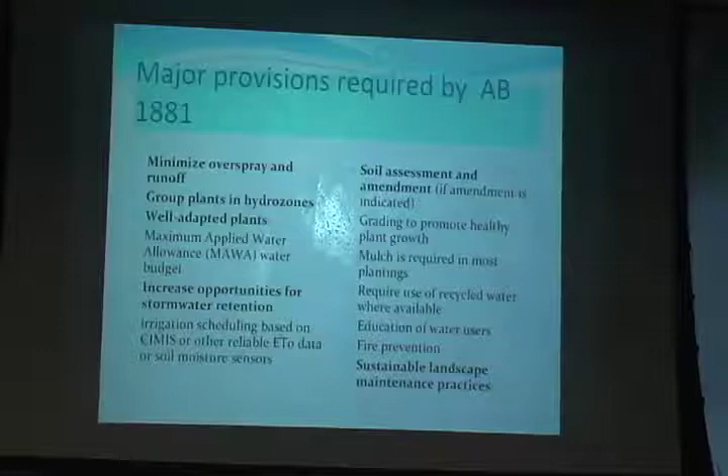So in 2006, a law was passed that said that DWR has to update an existing ordinance. This ordinance went into effect back in 1992, and it was a landscape ordinance. All the cities and counties were supposed to follow this when they did any kind of landscape development. Most of them didn't really follow it. So the legislature, recognizing all these issues that California is facing with pollution and our population growth and our infrastructure is maxed out, passed a law that said we need to look at this again.

And I'm not going to go through them because I actually brought a copy of the ordinance with the law attached to the back, so please take one. But these are the most important things, the most important provisions.

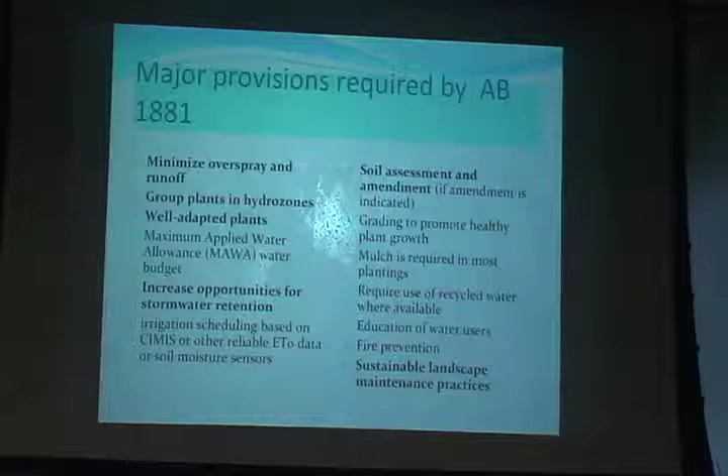And if you look at them, they're all kind of BMP stuff because we really need to follow best management practices when we install landscapes. They're taking over, they're kind of replacing natural spaces, so they need to function and not contribute to the problem. They need to be regenerative and solutions and still have their functions met.

So the most important things are things like minimize overspray and runoff. Group plants in hydrozones. I mean, what a concept. We put plants in a place where they'll be compatible with other plants. That's really been a problem. So you have to irrigate them all funny to make them work, and they won't survive if they're not in a hydrozone, because one or the other is going to suffer if their irrigation needs, their water needs are really different. So put them together. They need to be well adapted to our climate.

Use native plants or things from other Mediterranean climates. Why fight it? There's many thousands of plants that will grow here in California and do really well without having to have tremendous inputs.

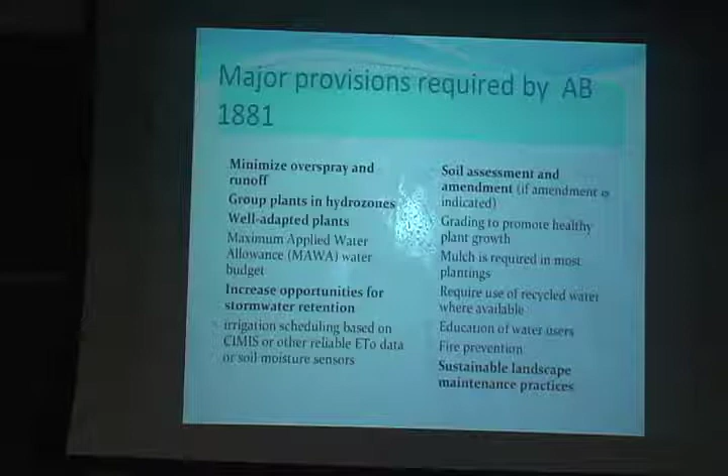Increase stormwater retention. You know, we're shedding all of our rainwater to the ocean. We need to keep it on site, let it soak into the ground, and let it move out to the ocean more naturally and slowly. And you can see they're all really important things. But I'm not going to go through the whole list.

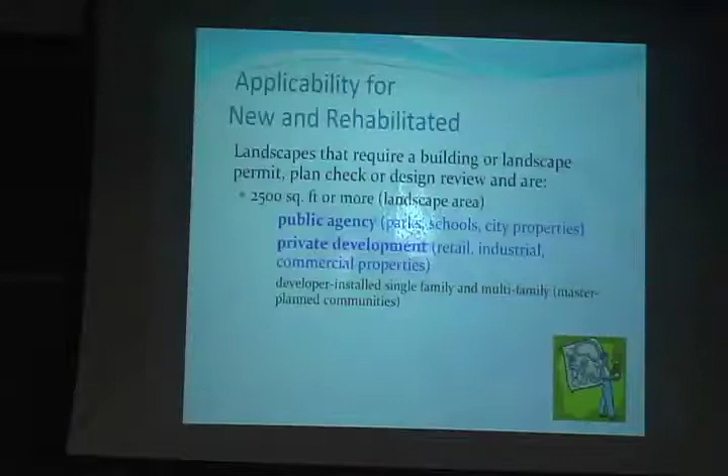That is probably the most important of the provisions. You guys can do a great job building a really great landscape with good plant choices, artistic and functioning well and gorgeous, and then they'll hire a really terrible maintenance contractor who tops your trees and shears your shrubs and won't replenish the mulch. So this is something to think about—how are they going to maintain it after you've turned over a design and it's been installed?

I'll put this in real quick. There is actually a law that says it's illegal to waste water. It's in the state constitution. So I just want you to think of that—it's very important, and it's recognized at the statewide level to not waste water.

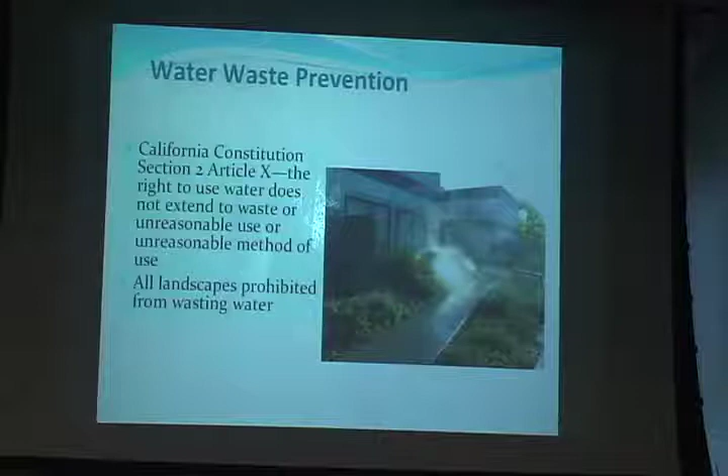This is a very common sight everywhere you go. Since you've been in the landscape architecture program, you've kind of seen the world with new eyes, new glasses maybe. When you're going around, you're thinking, I wouldn't have used that plant, or I would have done something different here. Look at how the sprinklers are not working properly. Those are the kind of eyes you need to have when you're going around in daily life, evaluating other people's work, and then you get an idea of how you can improve on that.

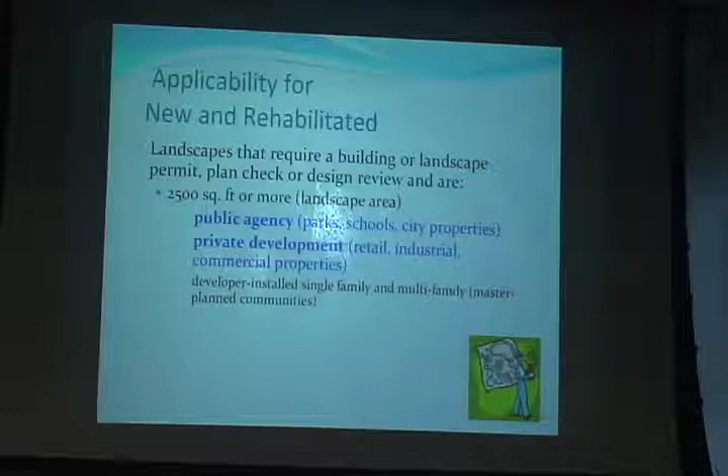So the applicability for the landscape ordinance is mostly new landscapes that are over 2,500 square feet—it's all new landscapes, but mostly new and rehabilitated landscapes over 2,500 square feet. There'll be public projects and commercial projects, like this campus at Intel in Folsom. It also involves developer-installed single-family homes, so we'll get to that.

So how about Cal Green? Have any of you heard of Cal Green yet? It's a new California building code—the landscape ordinance is actually in the building code now as of January. So cities and counties have to adhere to it from two different directions. Fortunately, they're compatible, they're the same. It's not like you have one set of rules from the planning department and another set to meet the building code. They're compatible—they use the ordinance as their baseline.

The only difference is that they require dedicated landscape meters on sites at 1,000 square feet rather than 2,500. A dedicated landscape meter is when you have your main line coming in off the street water main—they split it, so one line goes into the building and a separate line with a meter goes out to the landscape. That way they can track water use and do leak detection, since they know what's going into the landscape versus the building, and you can monitor it a lot more easily. Leaks are a big problem in landscapes because things get broken.

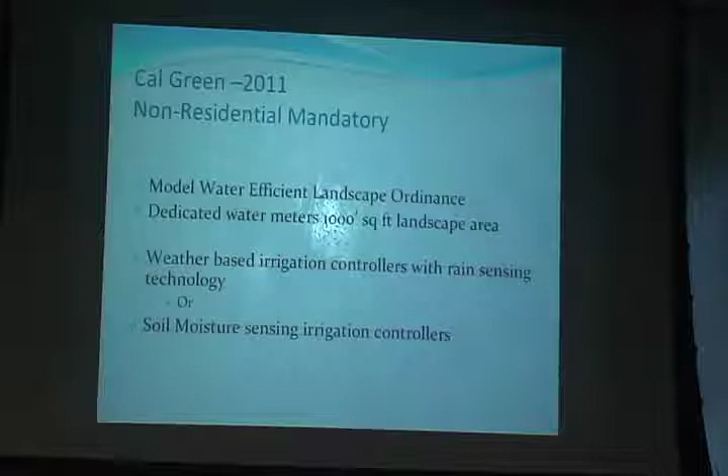So those are the mandatory things. They do kind of like LEED—they have some voluntary provisions where you can reduce the water budget. I know Lauren's talked to you about the MAWA before. They've modified it on a voluntary basis to lower the water budget to as low as 50% ETo. But that's all voluntary. You can see it's meant for green building—gray water systems, rainwater collection, all these things will give you points in design.

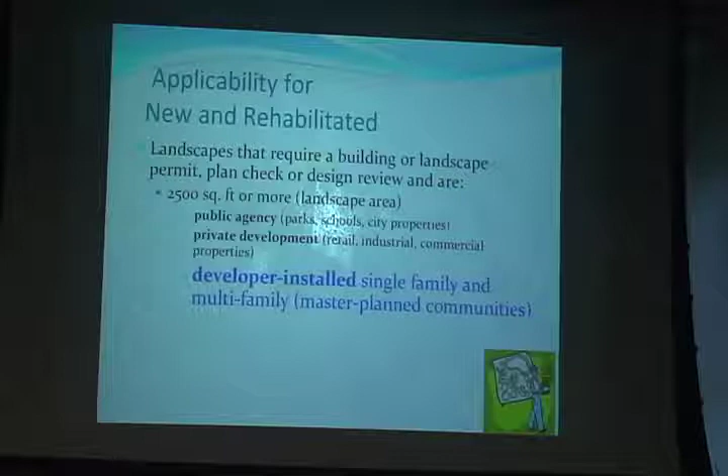So I did mention single-family homes. For developer-installed single-family homes, like a tract home situation, it's applicable. Now I said 2,500 feet—well, these guys are put through the planning department as a project, not an individual basis. So a tract home neighborhood's individual front yard landscapes might only need 500 or 600 square feet, but when they permit say 50 or 100 homes, cumulatively that's over 2,500 feet, using the same sets of designs throughout the whole complex. They might have 3 designs, the same plant palette, so it makes sense to aggregate them, and they're all built the same. That's why they're applicable.

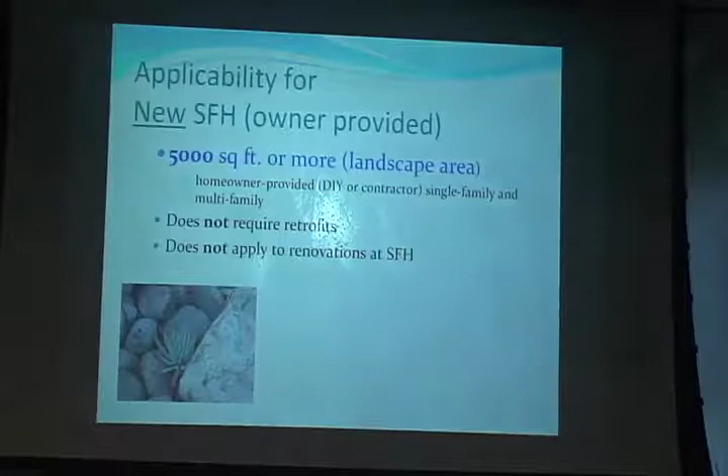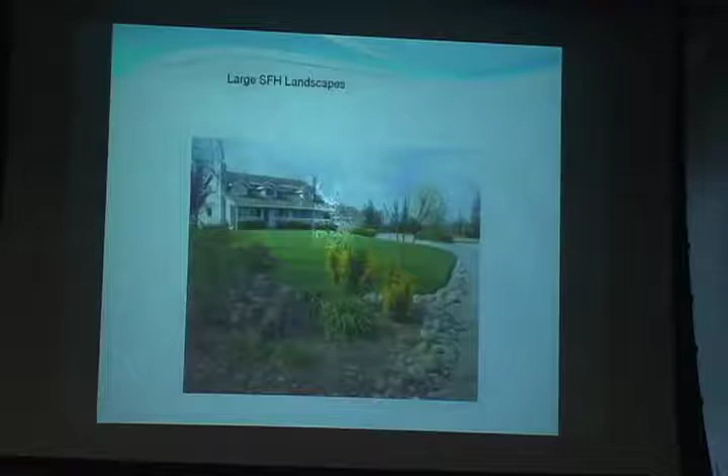Now if you have a single-family home where the homeowner is providing their own landscaping—hired someone or doing it themselves—the applicability jumps up to 5,000 square feet, which would be a larger kind of landscape. They have to meet the landscape ordinance too, but they're most likely hiring professionals anyway, so it's not a hardship.

So there is a Cal Green provision for residential. It's much less comprehensive than the non-residential. The only requirement for Cal Green residential is irrigation controllers that use some kind of sensor-based technology, weather or soil moisture, and they have to have a rain shutoff. They do have voluntary tiers where they can reduce their water budget even further, so their MAWA would be even lower. But again, that's all voluntary.

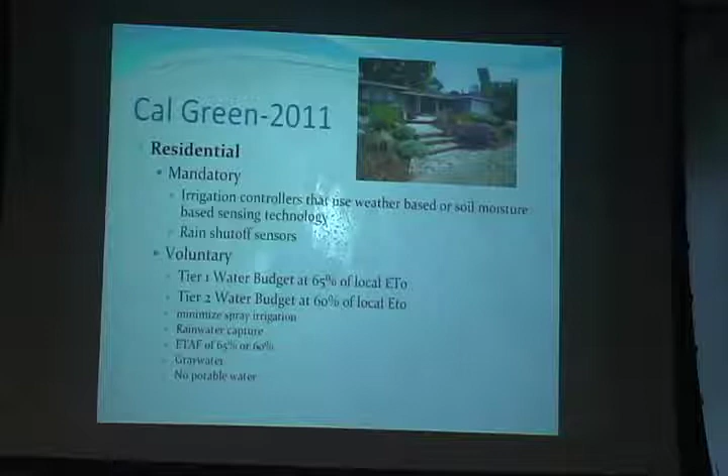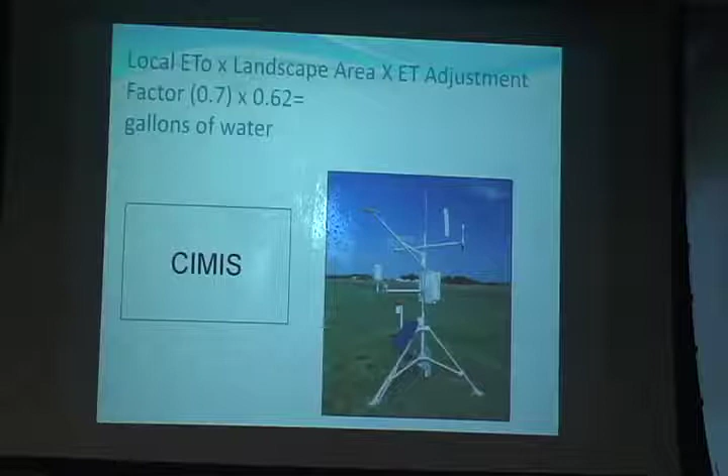And of course, the MAWA is calculated using ETo from the CIMIS network, and this is the CIMIS station here on campus, I think. I just wanted you to see that equation, and we'll get back to that. It's not a hard equation.

I mentioned BMPs. It was just kind of a coincidence that after we got done updating the ordinance, we looked at the Irrigation Association's list of BMPs, and they really tracked—almost in the same order, and it was just a pure coincidence. But it was the set of known quantities where we know these are the things that will build healthy and sustainable landscapes, and also the provisions of the law listed them out.

One of them that's really important and has been really ignored is soil management. It's in the state law, and we got a lot of pushback from the industry. They didn't want to do it, they didn't want to spend the money on it, but we felt, and the law said, this is important, so we put it in the ordinance.

They have to get a soil report. They need to know what's there—the structure, the texture, the pH, some nutrient issues. They need to know that, and they need to tell the landscape designers and the irrigation designers, because you need to know what soils are like so you can choose the right kind of plants. In Woodland, they don't grow camellias and azaleas, but I can grow them where I live, just absolutely fine in Sacramento, no problem at all. If you're building a site in Woodland, you need to know that the pH is really high and that a lot of plants are not going to do well there.

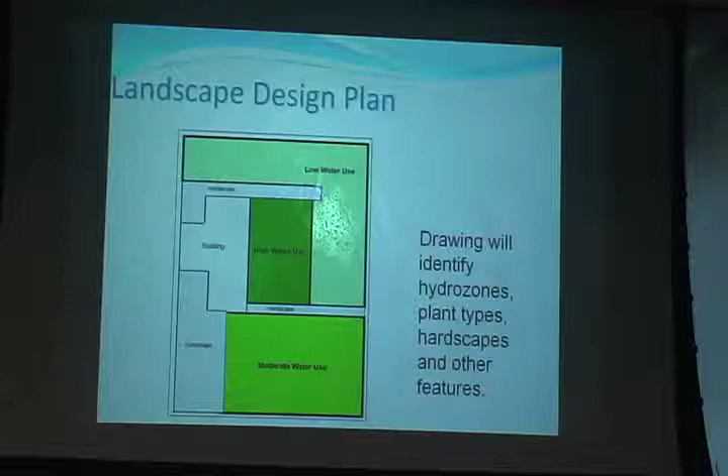So I talked about plants. They're obviously the most important part of any landscape. The law says any plants can be used—nothing is off the table except things like noxious weeds, which are banned anyway. But you just have to use them to meet a water budget: one-third high water use plants, one-third low, and one-third medium, or shift it to the moderate and low ends.

Here's a really interesting note I gave myself. There was a law passed last year, AB 1061, and I have a copy of it up there if you want, where it gives people that live in a community with an HOA the right to say, I want to plant what I want to plant. Because a lot of HOAs say you have to have this much turf, and you can't have low water plants, you can't have a Mediterranean garden, you can't have cactus, whatever. They set these rules, and people are bound by them if they live in that neighborhood, but that law sets those rules aside and nullifies them.

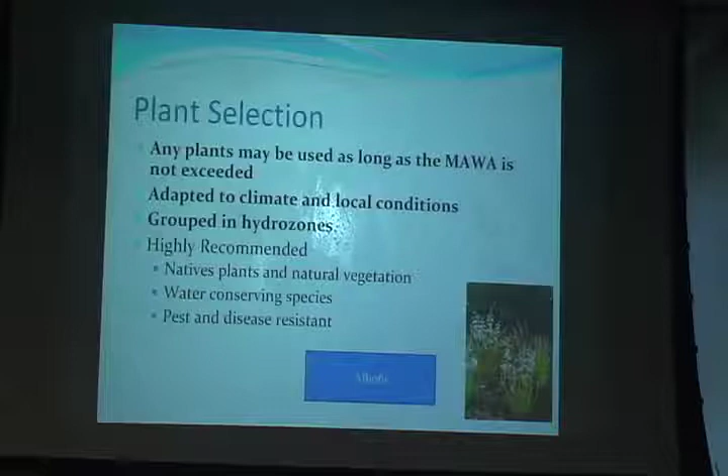I wanted to talk a bit more about the rules. I know you've had some great speakers lined up, people working in the industry, but I wanted you to think about, when you're choosing plants and doing the design, what's there besides just the form, the color, and the composition? What other factors do I need to come up with?

Things like native plants—use them. They don't require any irrigation, or very little once they're established, and they have the best habitat value. We're taking away natural habitat and putting in a house or a shopping center, then putting this landscape around it. If that landscape offers very little habitat value, it's just a big negative. But if you choose some native plants, they will be positive and can give back to the environment.

If natives don't work for what you're doing, use ornamentals from similar Mediterranean climates that require a lot less fertilizer, water, and pruning. Why generate extra green waste? Climate appropriate—that's the most important thing.

Edible landscaping—sometimes in a residential setting it's really appropriate to suggest people use fruit trees as a small shade tree. You can get ones bigger than semi-dwarf that actually function as a shade tree. A lot of vines have fruits too. Think about these other things. Make it, especially in a residential setting, more than just looking pretty. Maybe it'll do something for the people that live there beyond just shade.

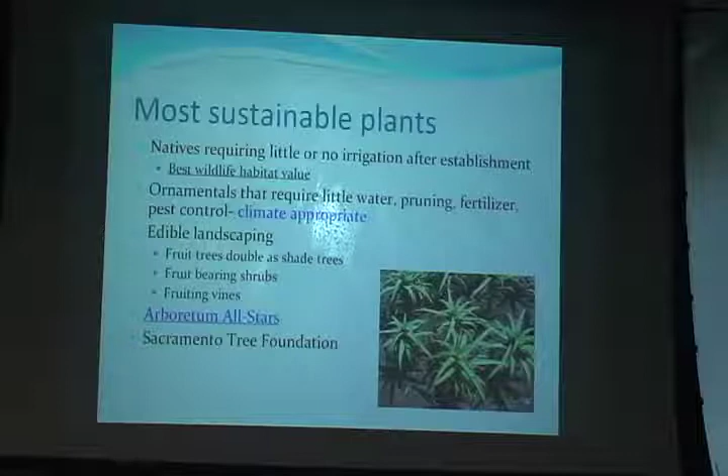I really can't say enough about trees. Think about trees—they're going to be there for a long, long time. You want them to be the best trees for the site you can think of. Trees are really important for water conservation too, because they shade, and for energy conservation. They shade the building, they shade the site, they make it a lot more pleasant and a lot easier for other plants to grow because it makes it cooler.

But think about the right size. Gosh, how many of us have seen redwoods planted in a 10-foot suburban lot? Those trees are going to have to be cut out in 10 years or sooner.

Make sure they're long-lived. Everybody wants to grow these fast trees that look great in 5 years and shade their house, but it's not really providing much service to future generations. If we have all these trees that die of old age at 40 years, we have to start all over again. So think of trees that are going to live a long time.

Don't plant just male trees. A lot of cities spec this out, wanting male trees that are fruitless so they don't have seeds and stuff, but then everybody has allergy attacks. So think about it—don't use fruitless this and fruitless that all the time.

And of course, evergreens block the wind. That's really important in a lot of places.

One thing we put in the landscape ordinance that I thought was really important: we recommended a separate irrigation valve for trees. These trees need to be watered differently than shrubs—once established, they need deep watering a couple times a month, not every 3 days like a shrub might. So think of that when you're designing your landscape.

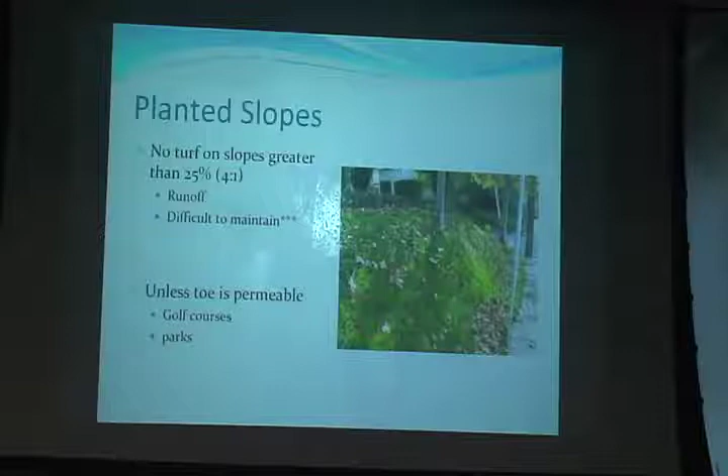This might be a better choice. Nobody needs to walk on that slope. It's just there. This is probably a better choice for a steep slope in a commercial setting or something like that.

Stormwater, I talked about how important it is to soak our water in the ground. That's what it did in nature, before we paved everything over. The rain hit, soaked in, and then the excess flowed out to sea. But now almost everything is excess because we've channeled our world in such a way that we discharge our water as fast as we can.

We've engineered our lots so the water sheds on our roof, goes out the gutter, and a lot of older homes have pipes straight from the house gutter right out to the street. So the water has no chance at all to hit the landscape and soak in. But that's changing, and so think about this when you're doing the design. Think about how you can incorporate some kind of stormwater BMP as a landscape design feature.

This is a parking lot over in Rancho. Every time it rained, it flooded. It was unusable, and then that dirty stormwater would end up right in the American River.

So the landscape contractor crew that worked this site decided we're going to change this. So they went in and trenched all these parking lot islands, and they planted some sedges and some sycamore trees, and they put a little curb cuts in each one. So all the stormwater that hits that parking lot goes in these channels and soaks in the ground.

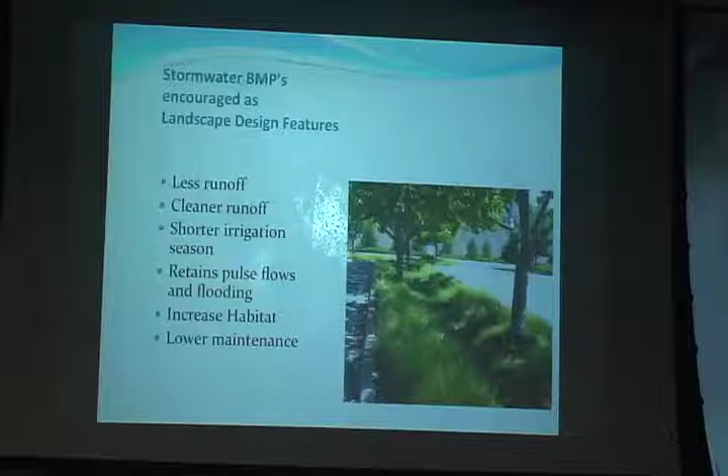And they only come in with a weed whacker once or twice a year to cut the sedges back and kind of clean out the leaves. They don't have to irrigate these trees except for a very brief time in the summer because by soaking in all that water in the ground, they've shortened the irrigation season. So they're not only saving water, they're cleaning the water that they're getting.

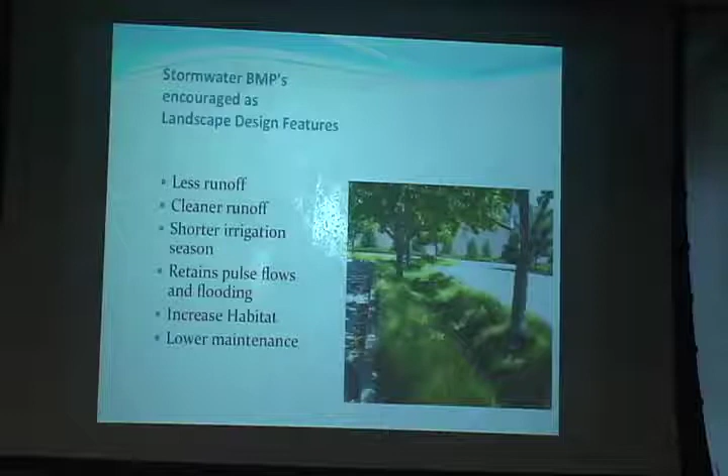So it could be something like this, or it can be a rain garden. These are getting to be very popular in residential settings. It's not a water feature because this water is meant to sit there and soak in. So it might sit for a few hours or a day or so if it's been very rainy, but then it soaks in.

And they've probably got a Carex or something here, it can be all kinds of plants. Sacramento County has on their stormwater utility website an amazing, really great guide to building a rain garden that you might think about for your residential customers.

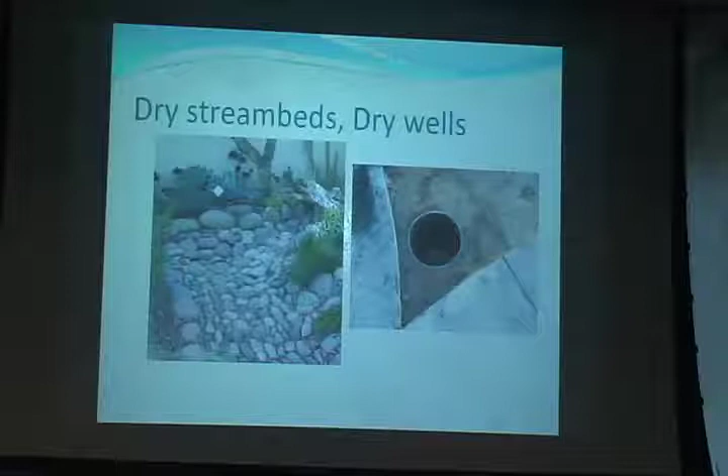You don't have to use just plants you associate with wetlands—dry stream beds, dry wells. This dry well is just a nursery pot filled with gravel. It collects all the rain that comes off one gutter of the house I showed earlier, and it goes into the ground instead of hitting the sidewalk, so it soaks into the ground where trees can take advantage of it.

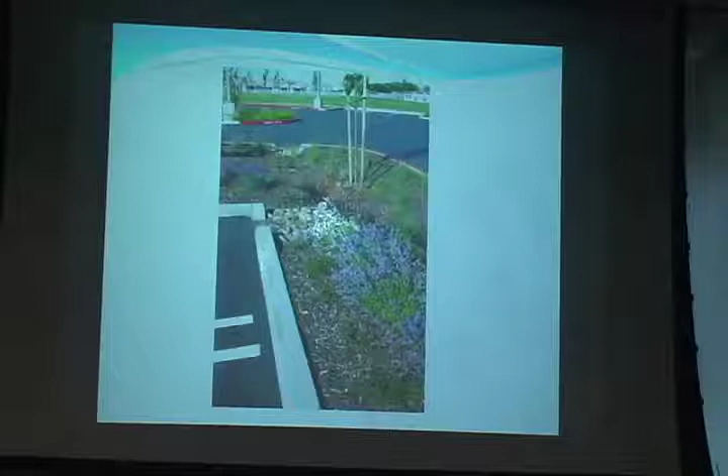I've talked about how you don't have to use just boggy plants. This is in Roseville—they're using lavender in the stormwater treatment. They have curb cuts here, so parking lot runoff collects down in this depression. But they've built this stormwater BMP so that even the lavender are fine, since they're above the saturated area. So they don't have wet feet, and they do great there, and can handle the heat of the parking lot. Keep these things in mind.

The second plan I talked about was the irrigation design plan, and one of the most important things—if you work in the irrigation part of the industry, think about this—is pressure regulation. The problem with pressure is usually it's too high, and the equipment is built and engineered to run at a certain pressure range. Usually the pressure you get from the city is too high, so it blows out, misses, blows off into the wind, and is wasted—it never hits the ground where it should.

Too low of pressure is real common in places like parks and ball fields, where they use rotor sprinkler heads that may throw 50 feet. They're very efficient, throwing a lot of water over a large area, but they need a lot of pressure to run properly. So parks, ball fields, and similar places need to boost their pressure. These are all things to think about when designing a landscape.

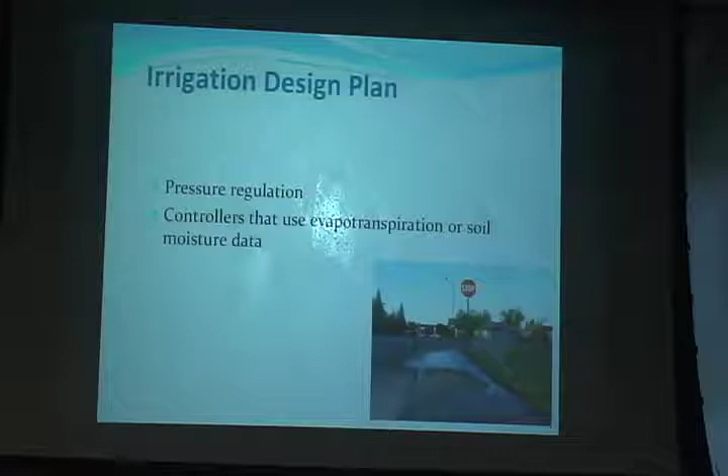This is a good example of blowout from high pressure. It's a pretty new landscape, and they should know what they're doing—the equipment's new, but it's not well designed. They're using sprays in shrub beds, so the uniformity of water is blocked by the shrubs. What they call distribution uniformity is really bad, because it hits a shrub, drops, and the shrub behind doesn't get any water at all. Pressure's too high, and they're irrigating at 5 in the afternoon on a windy day, so most of the water is either in the air or on the sidewalk.

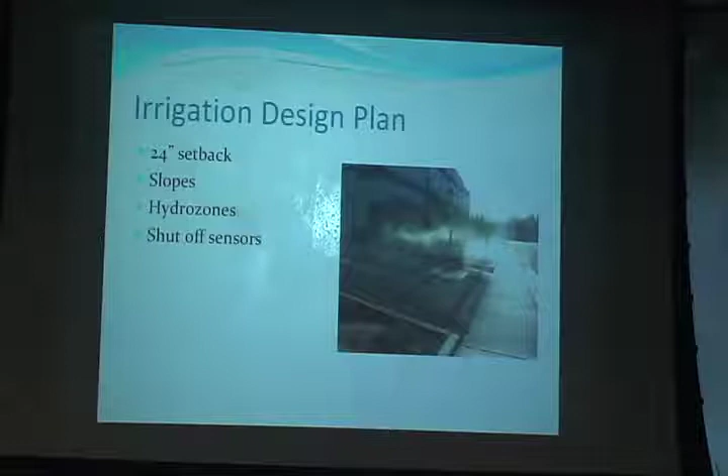One thing to think about with landscape design as it relates to irrigation is the ordinance requiring a 24-inch setback—for the first 2 feet from non-permeable hardscape, you have to have no overhead irrigation. That doesn't mean you can't plant, and it doesn't mean you can't plant turf there. You can, you just have to irrigate that first 2 feet with something besides overhead spray, because it's almost impossible to keep that water in the landscape and off the sidewalk.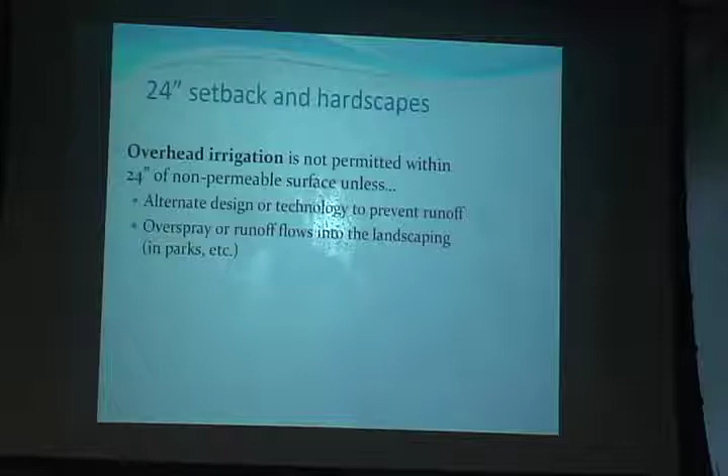There are a couple of caveats about the interior of the park or landscape, because if water hits the sidewalk there, it'll go back into the landscape. But on the edge, our goal is to prevent overspray and runoff—so that's what this setback rule does.

Here's an example of it. They've planted right up next to this patio, and I think they used Netafim dripper line to irrigate this margin, so they don't have any water hitting the sidewalk or patio ever, except rain. You can put turf all the way up there and irrigate it with subsurface dripper line as well.

Swing joints. Do any of you have any irrigation experience at all? Okay, so do you ever use swing joints or know what they are?

This is a really easy, cheap piece of equipment that I'm really glad is included in the ordinance. You've probably driven by a site where it's leaking all the time, or there's a fountain going on when the sprinklers are running.

The swing joint is just a little piece of equipment that you put underneath the sprinkler head and the riser, so that if somebody steps on it, or drives a bike or golf cart on it, it won't break the riser. That seems like no big deal, but on a commercial site this could go on for years and years. So the swing joint is a cheap piece of equipment that prevents that.

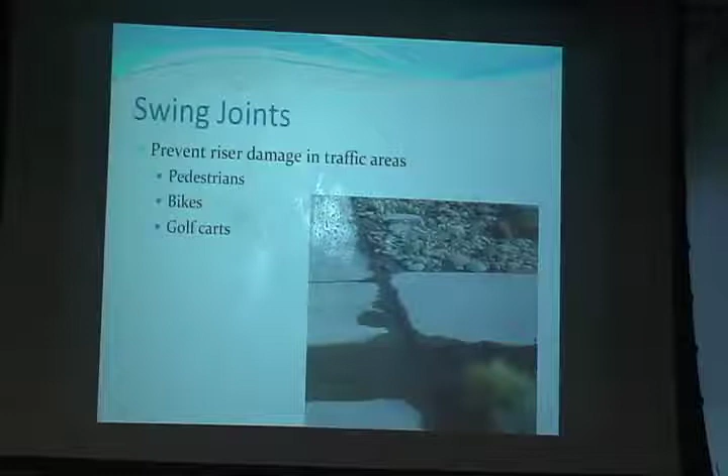I talked about slopes a little bit. Because of irrigation issues and safety, turf isn't allowed on steep slopes, but you can irrigate slopes as long as the precipitation rate is less than 0.75 inches an hour, and there's a lot of equipment that does that. This is an old landscape - this would not fly under the new rules because it's probably about 80% turf. The law says no more than 1/3 of the area can be high water use plants. So if they're using cool season turf, they can't have more than 1/3 of the area in that.

But the point I wanted to show you is this. Is that moss? That's moss, that's algae. Algae is slippery. At the bottom of this hill, they don't have any check valves in their irrigation system.

Check valves are another existing cheap piece of equipment. A lot of sprinkler heads are built with check valves already inside them. What that does is when the sprinkler system turns off and the pressure is gone, it stops all the water in those pipes from just draining down and oozing out at the bottom.

When you have a big site like that with a big gradient, a lot of water is still left in those pipes. This has gone on for so long - I have other pictures you can kind of see right here - that the pavement's been eroded down to the aggregate because it's gone on for probably 20 years. And then algae is growing here. That's another liability, a slip and fall hazard.

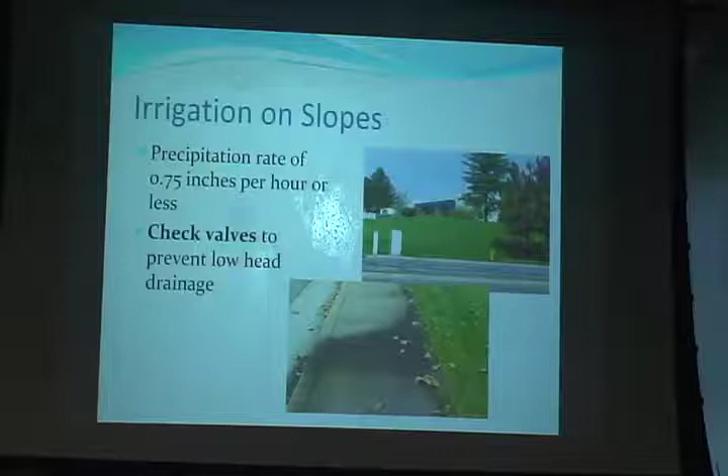So there's a lot involved and a lot to think about with commercial and public sites, and even residential sites.

So this I wanted to show you - this is how bad it can be. This is a bad choice in landscape design. This is kind of a steep slope along a couple of busy streets by the Roseville Auto Mall - kind of rocky, crappy soil, Mehrten Formation and all that. So water doesn't soak in very good, it just takes a long time.

So they put this turf here, and I took this picture about 6 years ago. At the time there were purple leaf plums and redwood trees. The purple leaf plums were all in decline, the redwood trees were not looking very happy, and the purple leaf plums were dying.

There's so much water coming off this site, they're growing cattails in a vacant lot. They're irrigating this turf so heavily that they could keep the turf green and grow a wetland - an unintentional wetland. This happens all the time in a commercial setting because nobody's out there checking it, nobody takes ownership. So I'm thinking, what's going on with that site?

So I went by last year and took another picture. It's still going on, to the point they're growing willow trees in a vacant lot. All the purple leaf plums are gone and dead, and the redwood trees are dying. They're over-irrigating to the point that the redwood trees are dying because the soil can't hold that water and let it drain - it just kind of sits there on that volcanic hard pan.

And it all runs off, and you've got this artificial wetland. You can see by the pictures this is in the middle of summer - this isn't spring runoff, this is summer. It's all brown out here beyond where the runoff flows.

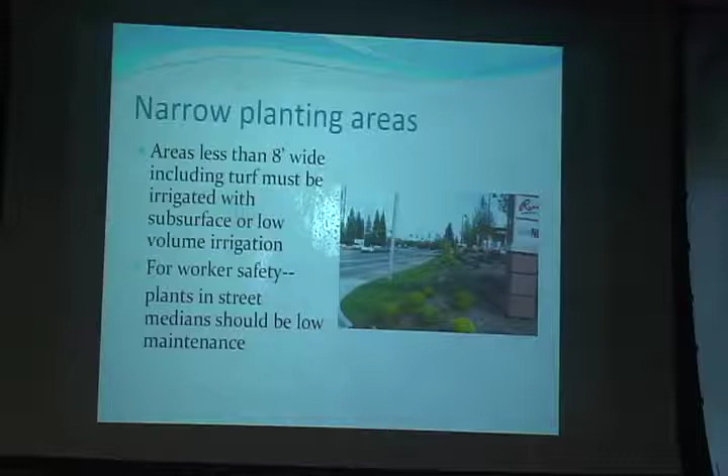So no longer. They can still have narrow planting areas, they can still have narrow grass areas, they just have to irrigate it with something besides overhead spray. It's not that we're trying to take away creativity, we're just trying to create solutions. So if somebody really needs that narrow turf area, they can still have it, they just can't irrigate it overhead. So maybe this is a better choice.

You can take the star jasmine or whatever and use drip on it, and it will be happy, and it looks just as green and just as attractive, if more so.

So the third plan I mentioned was the grading plan. I'm not going to spend any time on it, I just wanted you to think about it when you're grading. Obviously there are building codes to meet as far as keeping the foundation dry and shedding water. But once you get beyond that immediate building footprint, think about how the grading can be done to preserve the soil, minimize compaction, and maximize infiltration. Healthy soils build the soil and don't ruin it, don't compact it. Just driving vehicles across the soil will destroy the structure, and that's the last thing you want if you want your plants to live.

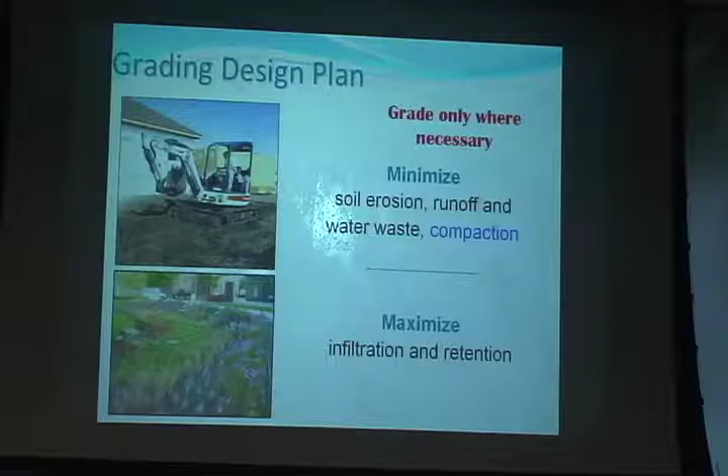So anyway, resources. There's a lot of them out there. Please search them out. River Friendly in Sacramento County, Bay Friendly down in the Bay Area, Ocean Friendly is a program put on by Surfrider, the Sacramento County Rain Garden Guide. If you're going to work in the desert, Coachella Valley has a really great guide on desert landscaping. There's a big program in Southern California called California Friendly. And just about all the water agencies have their own programs.

So locally, talk to your water agency. A lot of them have gardens you can go visit. They have rebate programs, they have classes, so find out what's available where you're going to live and practice. My agency has partnered with the water agency group and Save Our Water, and one of the things we did this year was the State Fair Garden, and I've got some pictures.

There's a lot of interest in gray water. People are really thinking about it. It's water that comes out of your shower and your bathroom sink, not sewage, just gray water out of the shower. The authority has changed, but the regulations have loosened, so it's a lot easier for people to use it. So you might, at some point, have people asking for gray water systems. It's a good idea to learn about how that works and the rules behind it.

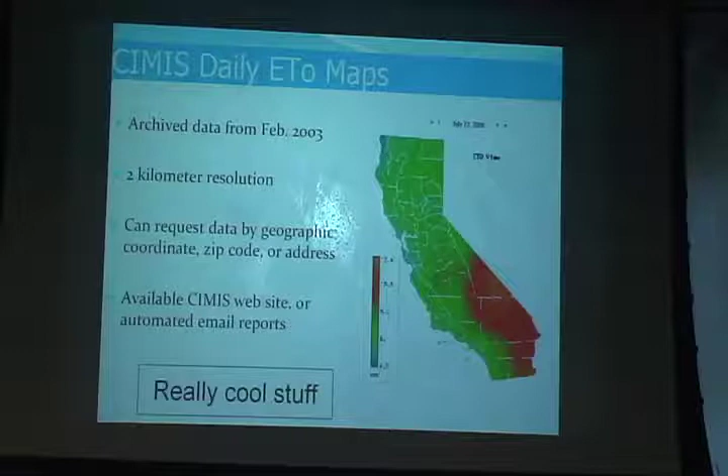They'll seek you out, and this is some other resources we have. They've upgraded the software, and I think it's really cool. I'm not an expert on it, but I like to show the pictures. With remote sensing, they've mapped out the whole state on a daily basis, so you can see what it looked like back last July and back in January. The brighter the color, the higher the ET of that day.

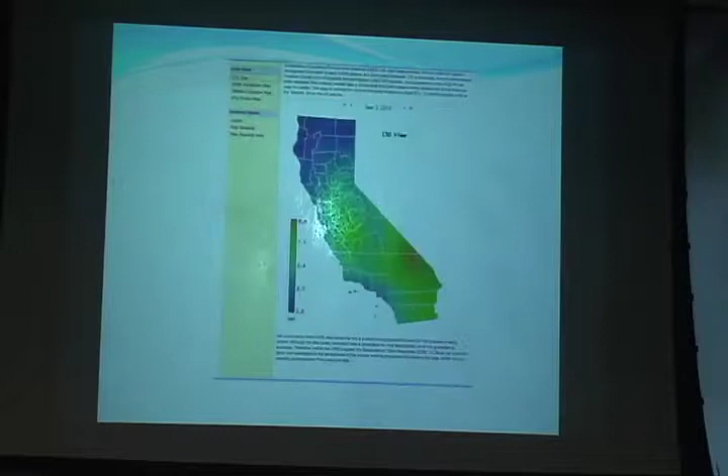So I'm writing a guidebook, and I would appreciate any input anybody has for me—what they think people need to know, or what they don't understand about the ordinance, and things like that.